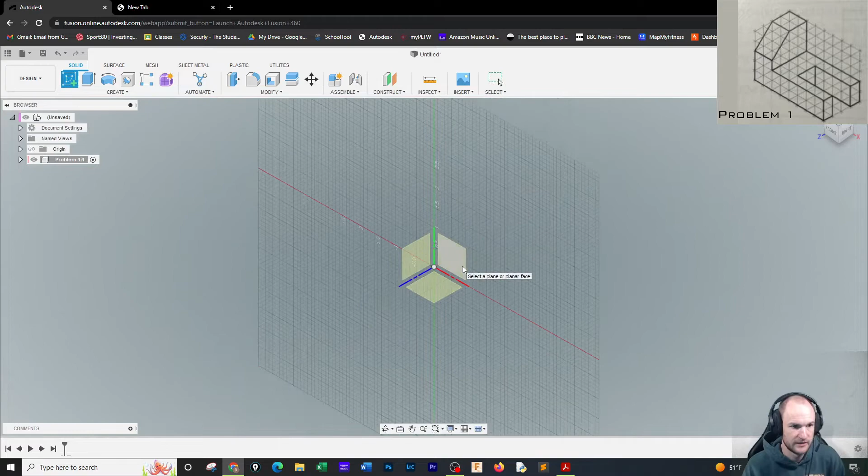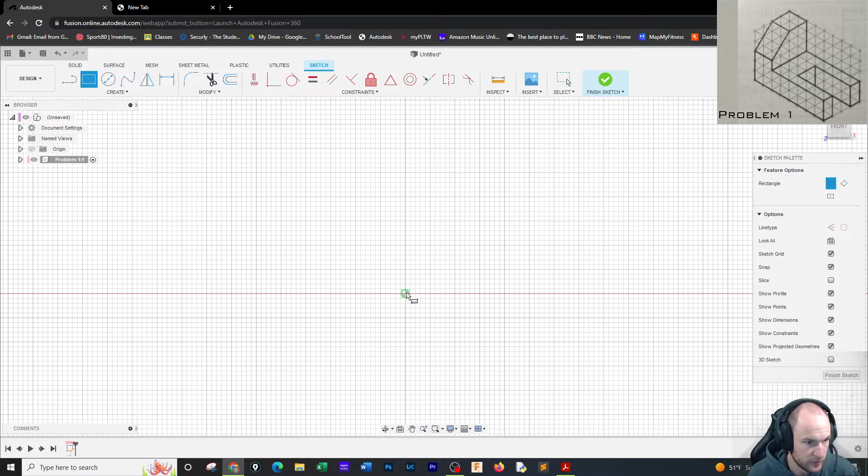I'm going to start by making a sketch on the front face, like so. I'm on the front face, and I've got to draw this shape, which is 8 boxes by 5 boxes. So it's going to be an 8 by 5, and we're going to go with 1 box equals 1 inch, which sounds totally reasonable to me.

And there we go, so I've got 1 through 8 across, and 1 through 5 down. Then it's going to be extruded 4 deep.

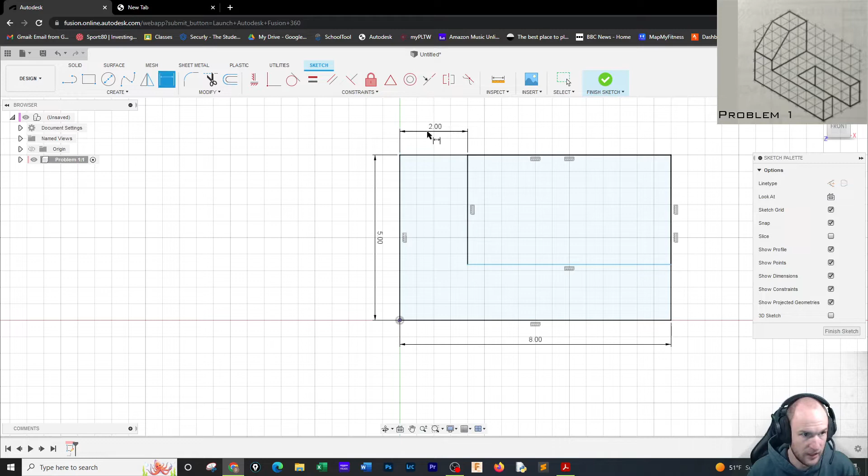But before I extrude it, I want to put in this box right here, and that's an area I'm not going to extrude. So this box would be 2 away from this face. I just want the dimension between this line and this line, which is going to be 3.

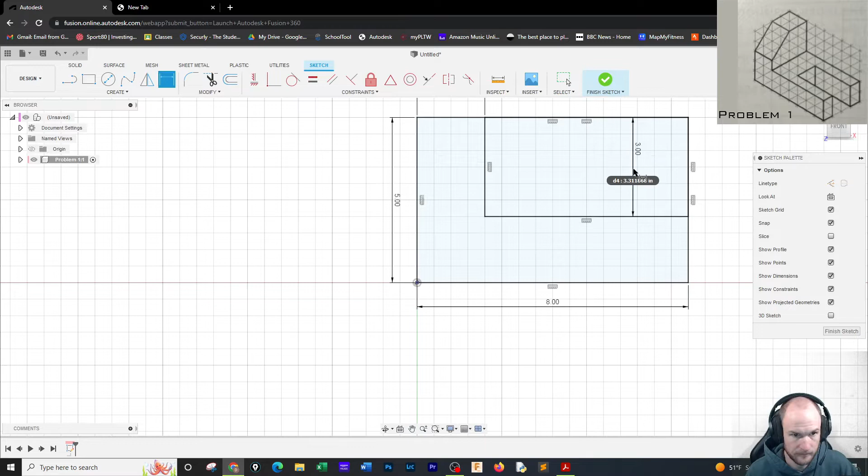Okay, so I'm going to hit finish sketch. I always like to go to the house view to give me the isometric, and I'm going to extrude this piece either forward or backwards 4. So I'm going backwards, I'm going to say -4. Okay, so that's the big part of the structure.

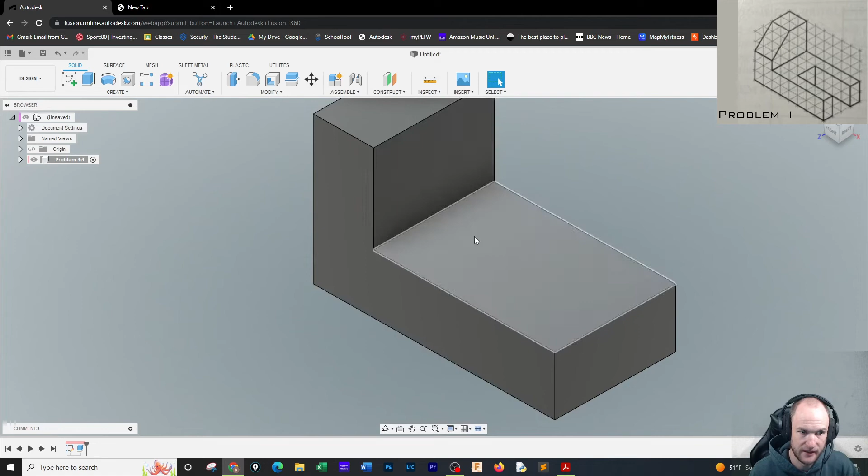If you're looking up there, we have to cut off of this face a diagonal, and then off of this face a rectangle. So I think rectangles are easier to draw, so I'm going to go and get the create 2D sketch, and I'm going to click on it.

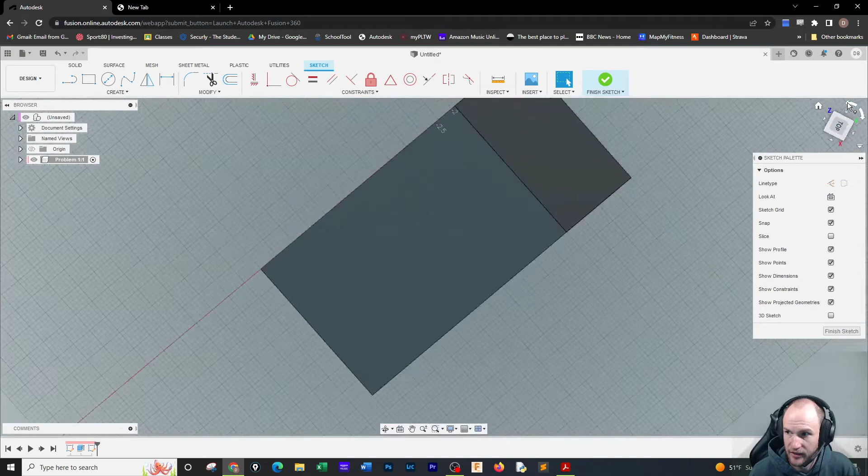It doesn't really matter which way, but I am going to rotate it. That is hard to see how to rotate, so I'm just going to quickly turn the image off to show you again. With the arrow here, I'm going to rotate the box around, and I'm going to turn the image back on so you can see a rectangle right here.

One of the important things I make sure I do with this rectangle is I'm making sure it is on this edge when I drew it. So it is most certainly on the edge.

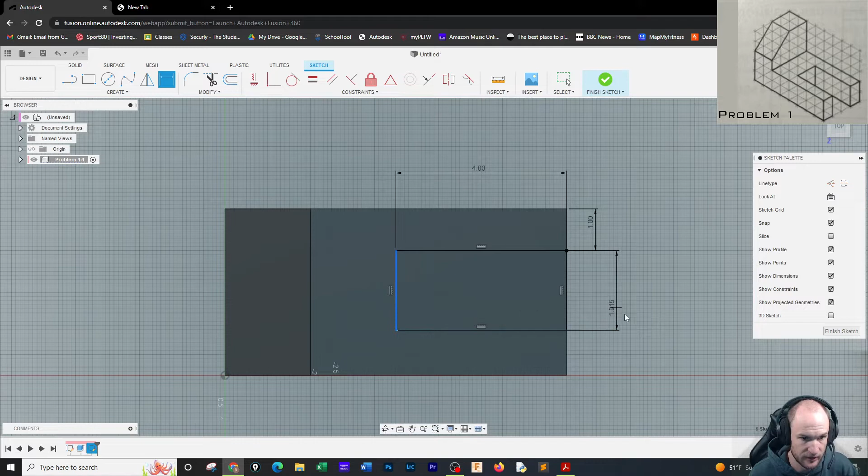I'm going to dimension the rectangle 3 times: once here, which will be 4 boxes. Notice how it is still connected to the end. I'm going to dimension it here, which will be 1 box, and then here, which will be 2 boxes. I could have also dimensioned here and made this one instead of the one in the middle 2, but that doesn't really matter. So I got 4, 1, and 2.

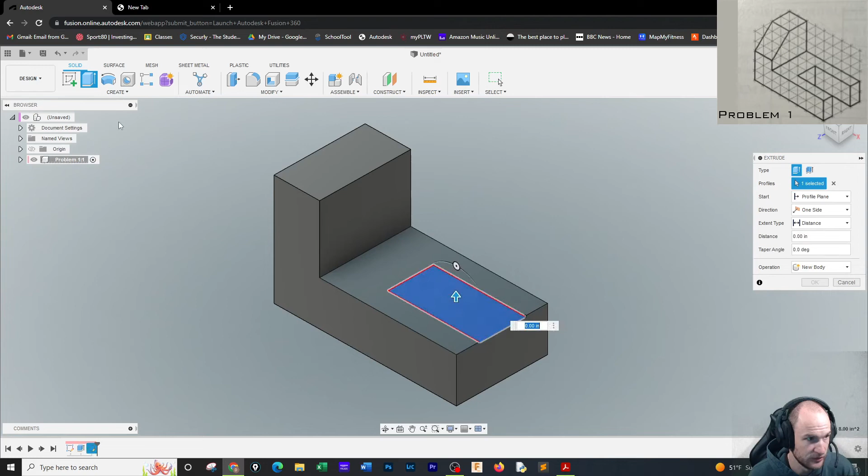I'm going to pop this up, and finish the sketch. From here, I'm just going to click on this face with the extrude tool, and I'm just going to pull it straight down. As long as it's going all the way through and you can see the red area, the operation is cut, we will not have a problem. So I'm going to cut that, and that cuts out that area.

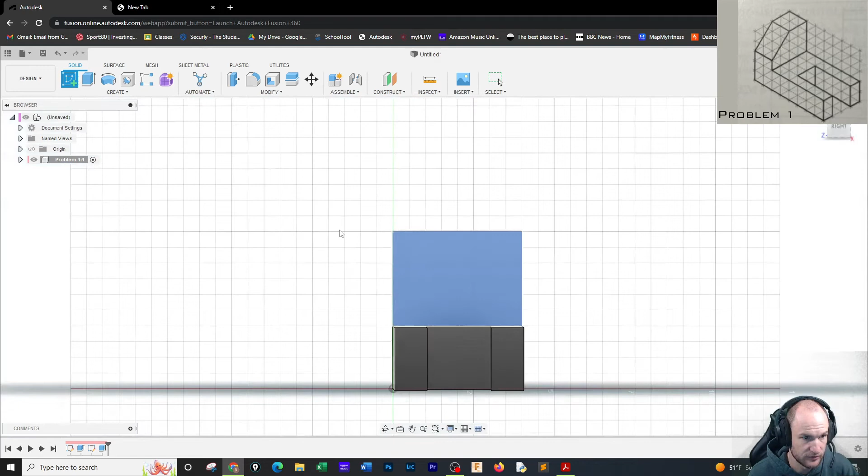The final piece for this drawing is I'm going to go right here. I'm going to click on this front face, and I need to just run a diagonal. To figure out how far that diagonal is, I've got to first draw it. Now one thing I made sure to avoid is you'll see right here these pluses popping up, that is the center mark. I do not want to snap to the center mark when I'm drawing my triangle.

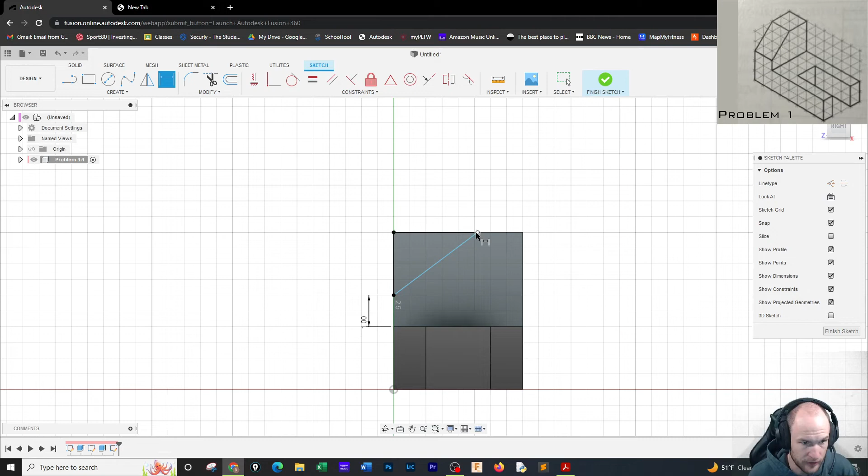The way I'm going to figure out what this hypotenuse is, I'm just going to dimension the points of the triangle from the edges I know. I know this is 1 up, so that would make that 2. And I know the other one, right here from this edge to this edge, we've got 2 solid boxes, so that'll give me 2 there. So I've got a 1 and a 2. I'm going to leave that up for a second so you guys can get the visual.

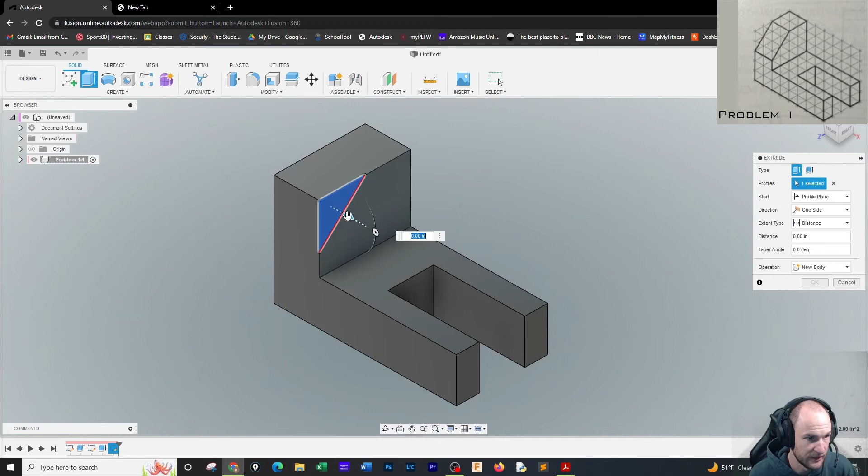I'm going to hit finish sketch, and then we're going to go to extrude again. We're going to click this area and just drag it through and finish that. And that is problem 1, and it does a pretty good job of matching what I've got up in the corner.

If you want to color this in, you can right click on your new component and get a color. I'm just going to go to paint for all of these, and I'm going to make this one blue. Just drag it on there. Not a crazy fan of that blue, let me make it a little more blue. There we go, that pleases me. Okay, so I got that.

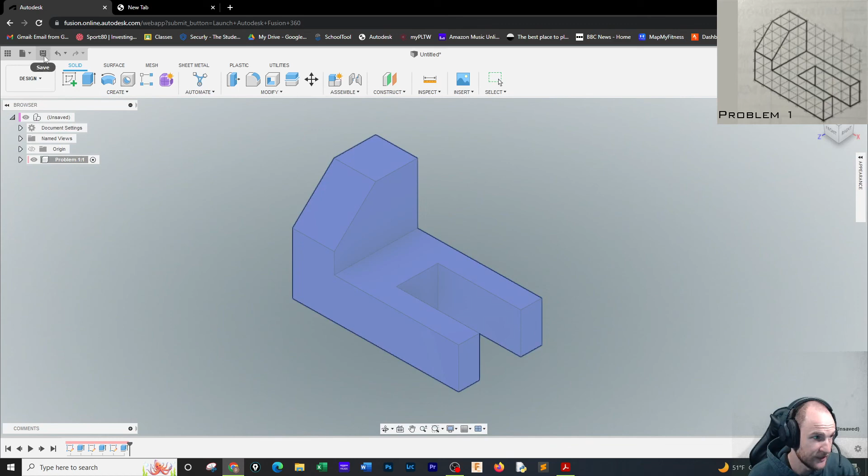I'm going to come up here and I should probably save. I'm going to save this in my middle school folder, and I'm going to save this as CAD Problems 1 through 6.

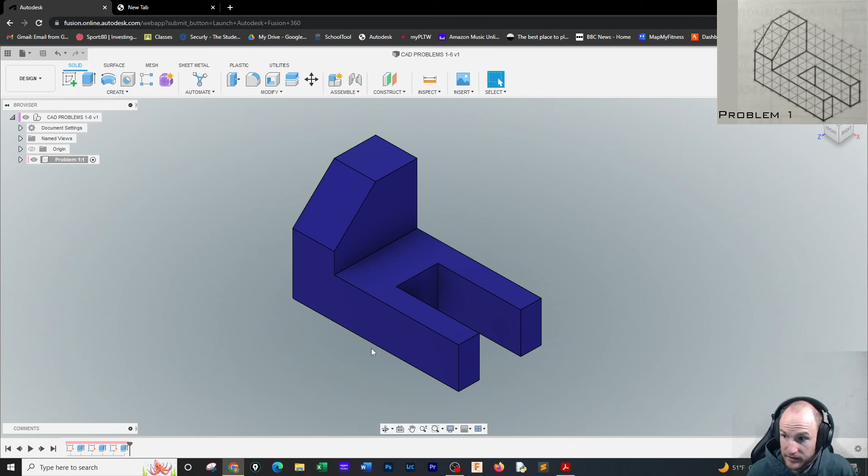All right, so that was problem 1. I'm going to make some more videos for the other ones. So this is problem 1.